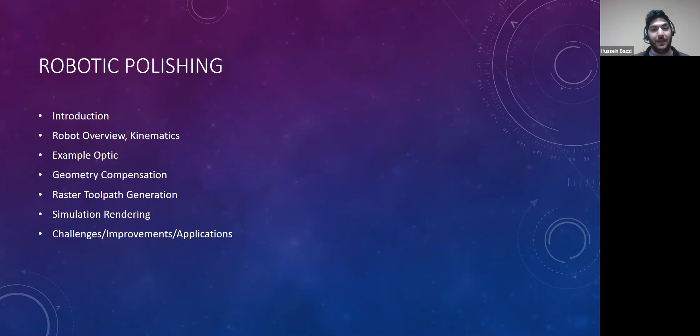So robot polishing is a great method to improve safety and consistency of the polished product. These products, in some cases, require extremely precise robotic design. A good example of this would be the ellipse mirror that we are polishing in our project.

What's interesting is that we can leverage our electrical engineering background to root cause issues and some of the quality problems, specifically leveraging our signal analysis skills. Here we gave some examples of how we can use power spectral density, Fourier deconvolution, and filtering to determine our polishing strategy and root cause some of the problems we faced during the design phase.

Here's an example of a commercially available robotic polishing system. It has 3 prismatic axes and 2 revolute axes, a workpiece mounted on the final Z stage, and a rotating tool spindle for applying the polishing force.

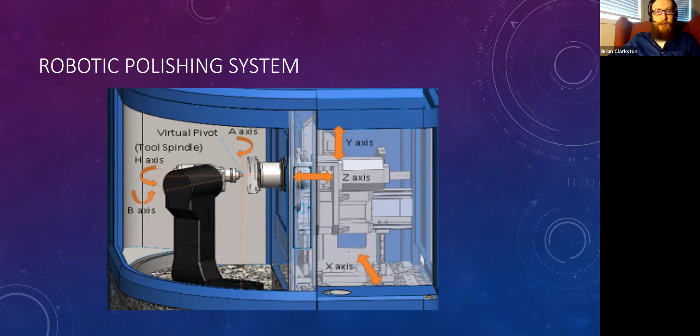This tool spindle features a load cell for constantly monitoring your polishing force, as well as being used for geometric probing on the machine to determine the orientation of the optic which you're trying to polish. So before proceeding further, we'll hop over to our demo video.

Currently we see the tool being pressed against different parts on the optic. While we're doing this, we're measuring the load cell force, and we can use that to determine if there's any tip tilt of the optic as it's mounted in the machine.

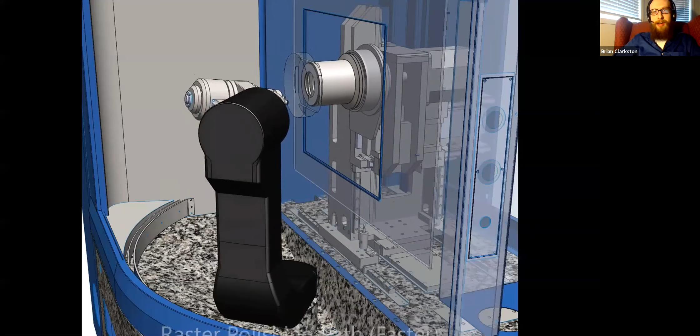After performing our geometry probing, we proceed with the raster toolpath, which we'll later show some of our MATLAB methods for automatically calculating a total of 6,000 points on a raster toolpath for this curved optic.

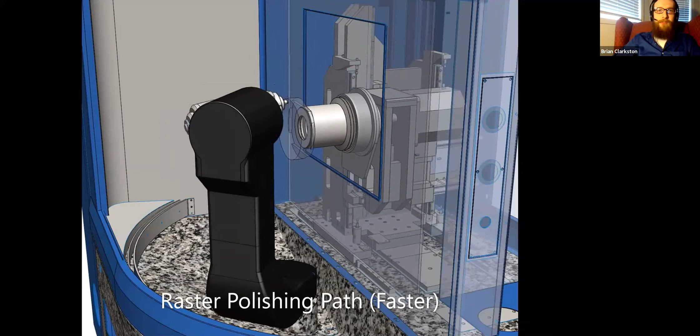It's hard to see from that angle, so we're going to give a little bit more visibility. Here we are actually looking behind the mirror, looking at the superimposed raster path along with the rotating polishing tool as it is moving along the optic.

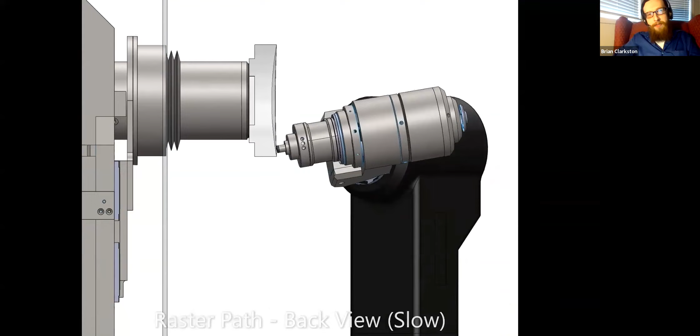Starting from the beginning of the raster path. In this view, we have better visibility of the B-axis of the machine upon which the rotating tool spindle is mounted. Here we can see that all axes have to operate simultaneously and in unison to accurately touch all points on the mirror.

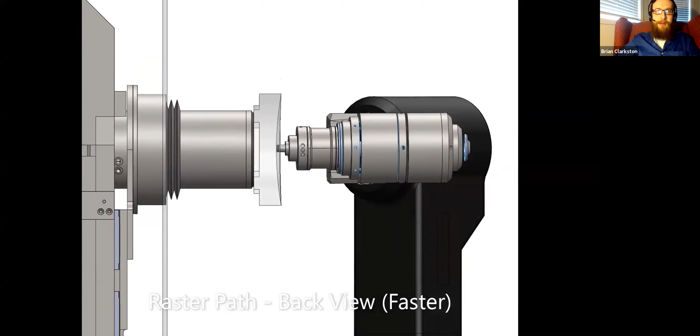Similarly, another view from the top. We'll speed things up here in a second.

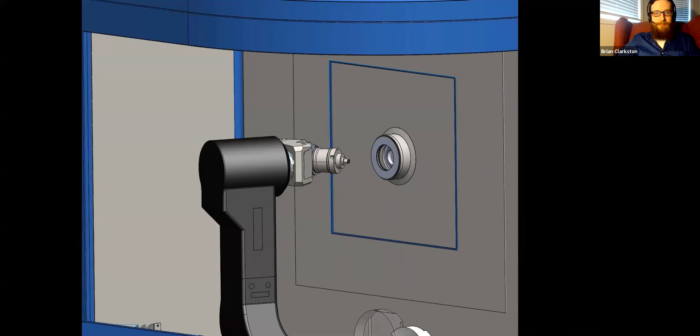Currently, we show the optic as being mounted to the machine using a vacuum chuck. However, a problem could arise, and we don't want that to happen, so we'll discuss other mounting options. So back to our presentation.

Looking at this machine, we see that we have 3 prismatic axes and 2 revolute axes. Using standard Denavit-Hartenberg parameters based on the joint offsets between these joints, we are able to derive the Denavit-Hartenberg standard parameters, which then yield a series of transformation matrices relating the different coordinate frames on the machine.

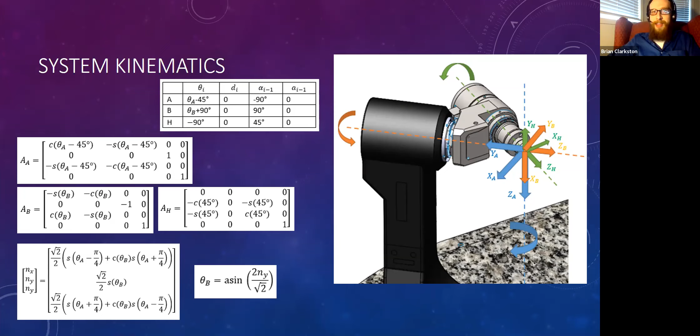We then relate that to the normal vector the tool is oriented to for a given position. We then use that orientation and derive the positions of both our A and our B axis in order to meet the orientation required at each point on that curved surface of the optic.

The optic we chose to polish in this case is a fairly generic ellipsoidal mirror. The benefit of ellipsoidal optics is that they take light coming off of a focus and refocus it elsewhere, which is largely beneficial in places where you need a focus distribution from point sources of light.

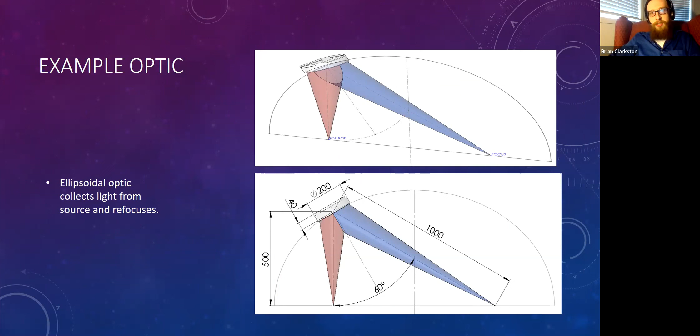From that optic prescription, we can figure out, not based on the position of the mirror in the ellipse coordinate system, but in terms of the substrate coordinate system with respect to the mirror itself and its center. Doing so, we can easily derive the horizontal and vertical positions of both the source and focus, given the property of an ellipse that the sum of the distances between the source, the mirror, and the focus is equal for all points on an ellipse.

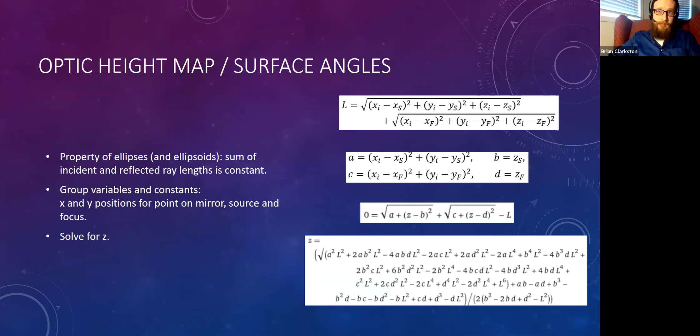So for a given XY position on the mirror, we can calculate the height of the mirror in its own substrate coordinate system without having to perform additional rotation matrices for transforming between the ellipse coordinate system and the mirror coordinate system.

Once we have the X, Y, and Z of the source, the mirror point, and the focus, we can draw two vectors between the source, the mirror, and the focus. By taking the angular bisector of those rays, we derive the surface normal vector, which is the orientation we require for the machine as we're polishing over that point.

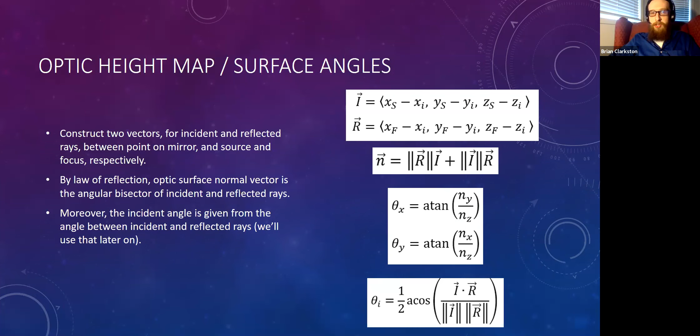And then Kevin was going to discuss how we can figure out where it is in the machine.

I'm going to be discussing geometric compensation, which is just a fancy way of saying it's our process to minimize as much error as possible while we're polishing the surface of our lens. The errors can be given by flatness, parallelism, and system errors of the grinding and polishing fixtures. A lot of these geometric errors are present when you're loading optics into a machine, and geometric compensation is just our way to obtain uniformity in polishing force across the entire tool path.

Our first process when doing geometric compensation is edge finding. Edge finding is our way to find our X, Y, and roll values. From the picture on the side, we have a picture of the lens with some coordinates. We take those and put them into our formulas with the transformation matrix to get our X, Y, and roll values for compensation.

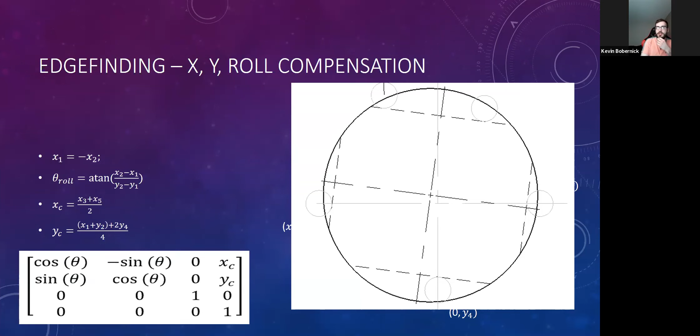From there, we have to find our Z, pitch, and yaw values. The easy way to do this that we found is to just put them in a robot spindle load cell with the polishing tool loaded.

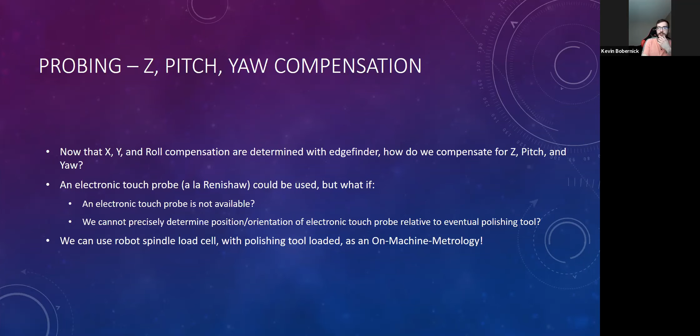And then Ryan's going to talk about our toolpath generation. Now that we have the alignment of the lens, we need to determine the shape of the lens. We want to measure where the real lens sits in 3D space and probe for imperfections. To do this, we can use the formulas from the previous slides to determine the XYZ tilt angles for the nominal mirror we're trying to create.

Again, we use two nested loops to go from point to point, but at each of these points we want to go through several steps to make sure we get good, accurate data from our probe. So for each point, we want to move quickly to a position above where our probe point is, with clearance, so that we don't hit anything. We want to do that very quickly.

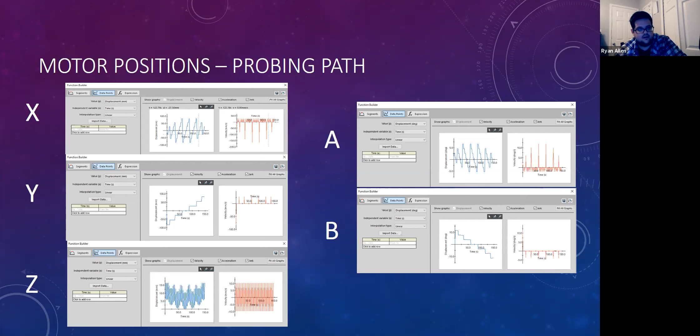Once we have those values calculated in MATLAB, we can perform a motion simulation with rendering. Unfortunately, several open source or freely available robotic simulation programs were unable to simulate this robot, by virtue of it having separate prismatic and revolute joints that needed to cooperate. Many such software packages only allow serial robots rather than parallel or cooperative robots.

So in this case, since we already had a CAD model in SolidWorks, we were instead able to perform a motion study in SolidWorks alongside the CAD design by importing each of the joint positions supplied by the MATLAB code and using those to control either linear or rotary motors to render that motion path in real time.

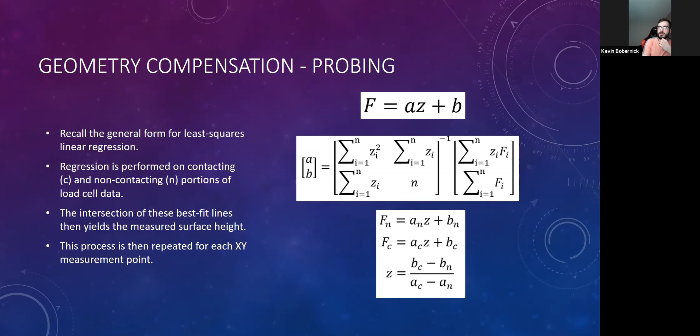The next slide is a picture of the errors between our measured and nominal surfaces. Recall that the X center, Y center, and roll angles were already compensated from our edge finding. From there, we take these values to find our least squares best fit plane.

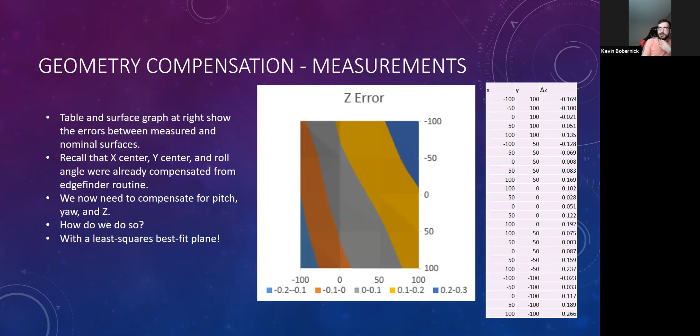The equation on the right shows our equation and the matrices for our least squares fit plane. Since the XY probing points are symmetrical, the matrix becomes a diagonal matrix, simplifying these inverse calculations. We then obtain our pitch, yaw, and Z values, which are then used in the transformation matrix, like I said, for our machine tool pathing.

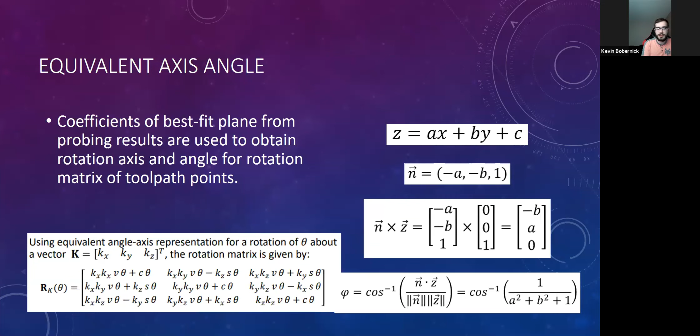So the equivalent angles are axis angles. The coefficients of these angles from the probing results are used to obtain our rotation axis and angles for rotation matrix along our tool paths. And these are just some of the equations and matrices we use to find it all.

Now that we have our probing points and our geometry compensation, we need to generate a path for the polishing machine to follow. To do that, we first need to define some parameters, like travel distance between points and distance between each pass.

For our application, we set it at 2.5 millimeters, but in a real life scenario this would be a much smaller distance. One other major thing to note is that during each pass, we also want the tool to go past the edge of the lens so that every bit of it is polished. Within our major parameters, we define that we go about 10 millimeters past the lens on each pass.

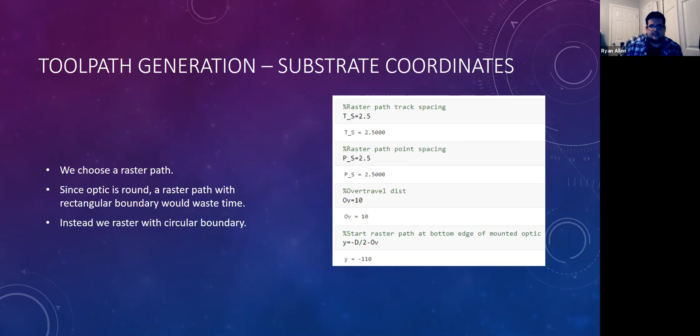The first nested while loop advances the tool in the positive X direction, moving it from left to right across the lens, stopping 10 millimeters past the edge. After that loop, a statement moves us forward to the next pass in the positive Y direction. The last nested while loop does the same thing as the first, but moves the tool in the negative X direction, so we go left to right, forward, right to left, forward, and so on until there's no more lens left to be polished.

So now that we have a series of nominal points on a perfect optic, if it was perfectly mounted, we need to take into account the results from our geometry probing and use those transformation matrices to translate from a perfect substrate to the mirror as it is actually mounted in the machine.

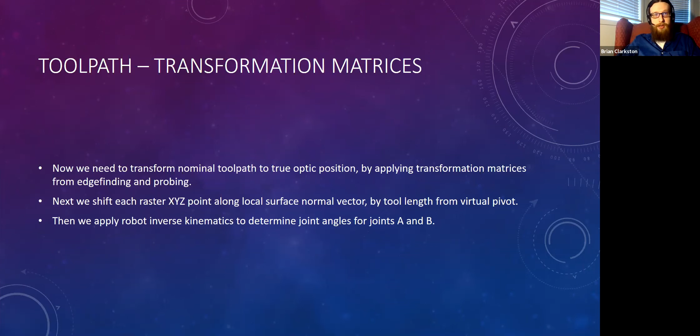After that MATLAB code, we can export each joint value as a separate comma-separated value file, concatenate that with time, import it into SolidWorks, and then simulate the raster toolpath shown previously. These are some plots of the joint displacements and velocities for each stage.

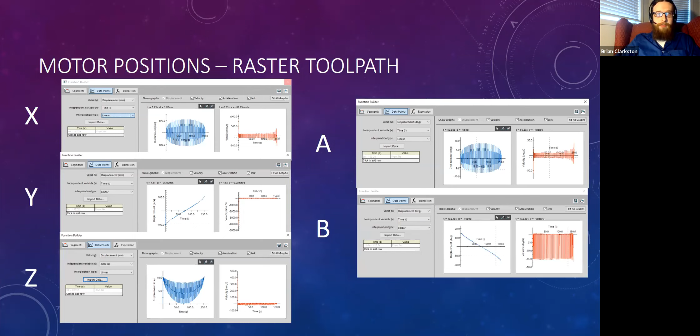Sorry, I know we are out of time. I'm going to try to quickly burn through the slides.

As we mentioned before, our initial plan was to use RoKiSim to simulate our robot, but then we realized it cannot handle this kind of application. So we had to do all our calculations using MATLAB and feed that into SolidWorks to simulate our robots.

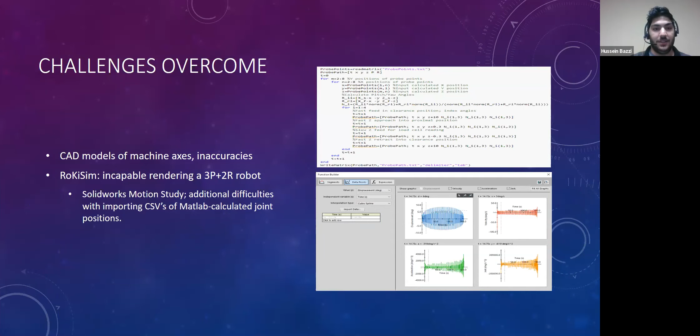Please move to the next slide. A possible improvement would be using kinematic mounting, because as we saw in the video, we were depending on the vacuum chuck, and in case we have a failure, a fault, or a power outage, this will cause a problem and most likely damage the lens or mirror we are trying to polish.

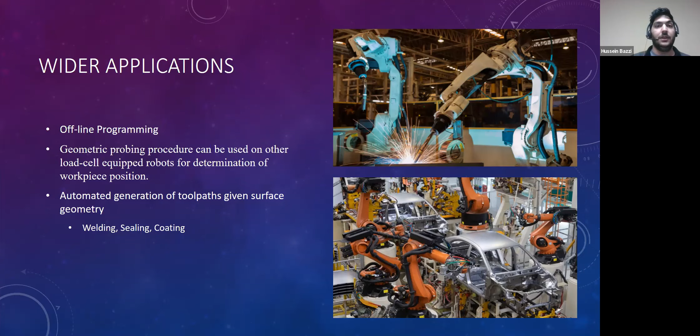Next slide, please. As we discussed in past lectures, we insisted a lot on the advantages of offline programming. Using the same techniques we used in this project, we can design robots for different applications, such as welding, sealing, and coating. So, questions, comments?

Great job, Group 16.

All right, well, I have to say this looks like a ready-to-use application. Are you guys already polishing optics? Well, unfortunately, our simulation experience during COVID was quite limited.

Okay, but it sure looks like you guys are ready to actually build the machine and start polishing some eyeglasses, maybe at least. Okay, well, this has some serious math, and I have to say your group probably used all of the math background I taught.

So this is great. Anyway, let's open up for questions for Group 16. Any questions for them? And guests can ask questions too. Anybody can ask.

I think everybody is still subdued with all the math you presented. Apologies, yeah, a lot of math for sure. It's definitely a complex project you guys picked. I think it's a great way to think through this and apply the math needed to compensate those curves. I really think it's a great try to implement this. You should be proud of yourself.

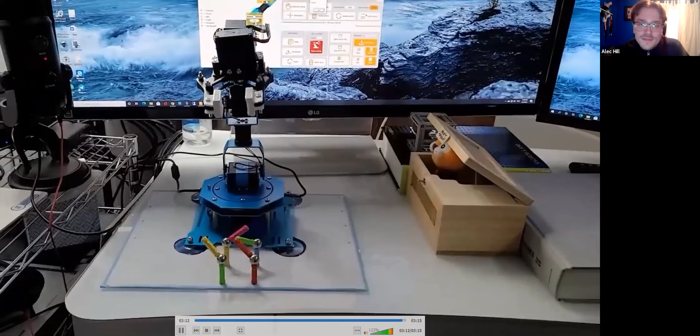The robot we were using during our project was the X-Arm 6 DOF robot, really it's 5 DOF if you ask Professor Mirza, which we programmed to construct the structure using magnetic rods and spheres, like I stated previously. Hopefully in the near future, robots will be implemented in the construction field to make construction safer, faster, and much more relaxed on the construction workers themselves.

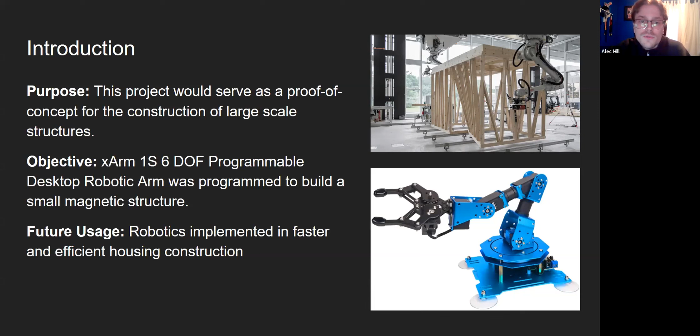Hello, everyone. One of the multiple challenges we encountered was how to grab, as Alec was saying. This robot is not ideal. The force that applies in the tip itself, the material, is not ideal for our application.

So we decided to design our own tool. We used PLA material and a 3D printer, and we were thinking to actually do two tools, one to grab the rods and one to grab the spheres. But we decided to combine both, and the goal was to design a single tool that was able to grab regardless if it was a rod or a sphere. So we were successful on that.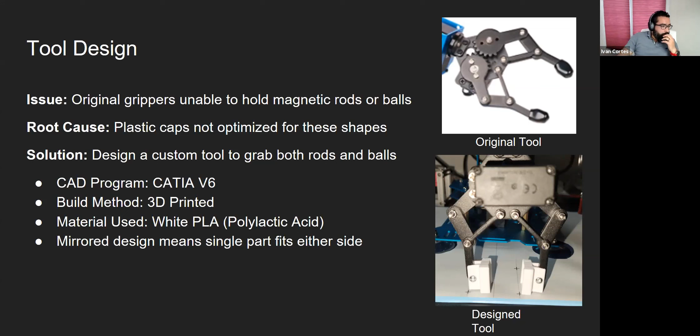In terms of programming the X-arm, as other team members already said, this X-arm robot has 4 different types of programming, but we found that the PC interface is way simpler. So we just position the robot by hand at a very close location, and after that we input those values to the servo. So we fine-tuned using those values.

And with that, I will pass over to Troy, who is going to explain more about the workspace that we use and the metal plate.

So after we established the workspace we'd be using, we positioned the robot so it was directly over the metal plate. That way the metal plate could assist us in placing and picking up our pieces because they would snap on and off. Then it was just a question of what are the limits that the robot can reach. And we found that it could pretty much pick up and place a piece anywhere on our metal plate.

The only real servo that was an issue was the base rotational servo, so there was just one dead zone toward the back. From that, we were able to calculate how many pieces we could put on either side, making sure there was enough clearance so that as the arm went down and opened and closed, it wouldn't knock any other pieces while doing so. So we could probably get about 15 pieces on each side.

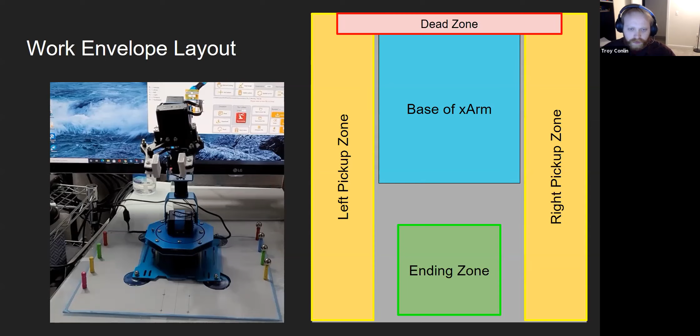So from there, it was about determining what sort of structure we could make. Unfortunately, the X-arm is very limited in terms of its degrees of freedom, so we couldn't make some crazy huge structure. From those previous calculations, we had about 30 pieces we could work with, so as long as it was smaller than that, we were fine.

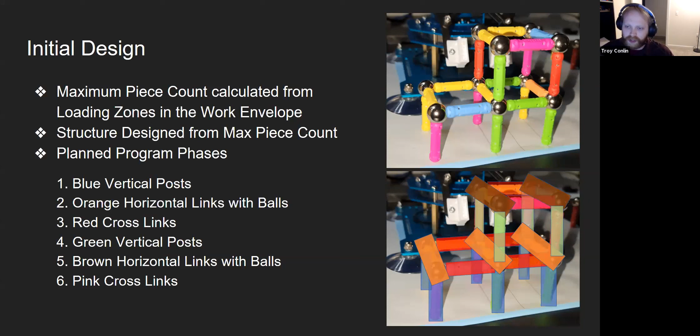And then the design would be as follows: it would place the base blue poles first, then drop in the horizontal pieces, then the next level, and the next level, and the next level. With that in mind, we had to make sure the arm was capable of even placing these pieces, because there are issues otherwise.

So we wanted to start simple and work our way up, and unfortunately we weren't able to work up that far. The X-arm has a lot of limitations that we ran into, the worst being that the wrist wasn't rotating as freely as we thought it would. It was only around 80 or so degrees of freedom, so we couldn't actually rotate a piece from 90 degrees to 180 degrees. From someone else's presentation, it looks like it actually can, so there might just be an issue with the servo that we had installed. So that's another conversation.

Our design had to change as these limitations became more prevalent. The fixtures that we had for the horizontal pieces that we used to pick up and place, the arm wasn't able to open wide enough to grab those too, so we had to sacrifice those horizontal pieces as well.

We wanted to do some crazier stuff, like dropping some pieces from the sky, and ironically 3 out of 3 times it worked, but something about that just seemed off, so we scrapped that idea too. But otherwise, even with the unreliability issues, we were still able to make this structure fairly consistently.

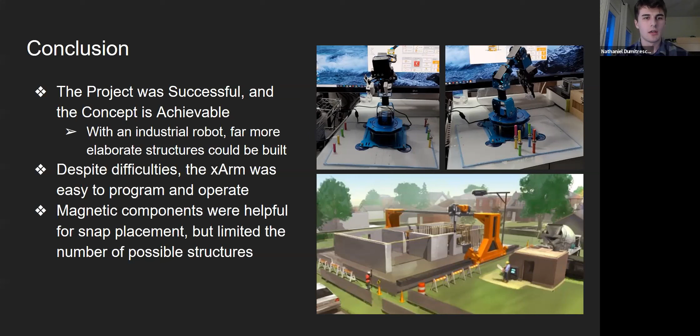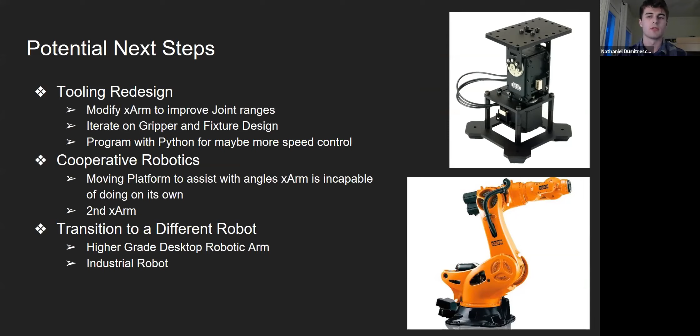Good job, group 17. Good demo, good presentation.

All right, so I was really hoping that at the end that you'd push those sticks to form a roof, like a pyramid roof. Yeah, anyway, so let's open up for a question for group number 17.

Any questions for them? Yeah, hey, this is Mike. Has the group thought about, they talked about doing construction and applying it to the construction industry. Are they referencing mostly the prefab approach, or have they thought about the challenges facing doing construction in the field?

That's a good question, Mike. I would say more or less construction in the field, as it'd have to be transported to the work site and then put up the foundations, like I said, or put up whatever they needed it to put up.

Okay, with a follow-up to that - if I'm doing a prefab in a building, making prefab, I have a controlled environment. If I am taking it to a job site, I have changing environment, changing power requirements, and changing foundations. All soil's not the same throughout the US. What thoughts have you put into addressing those type of issues?

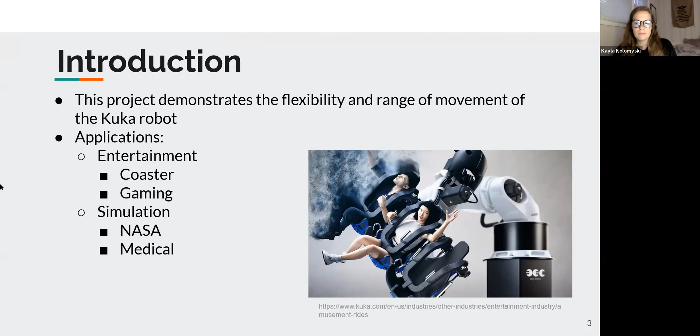Next slide, please. Here we have a short video of the actual KUKA coaster, which is from their website, just in case none of you have seen this represented before.

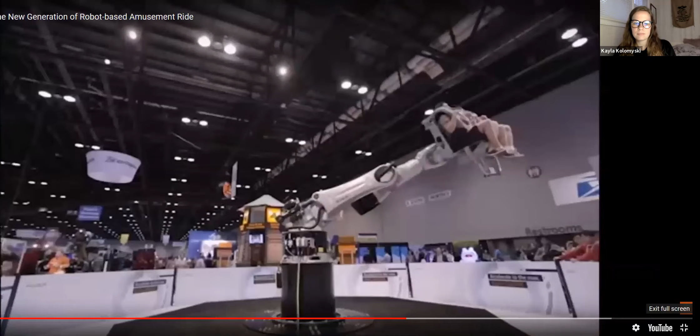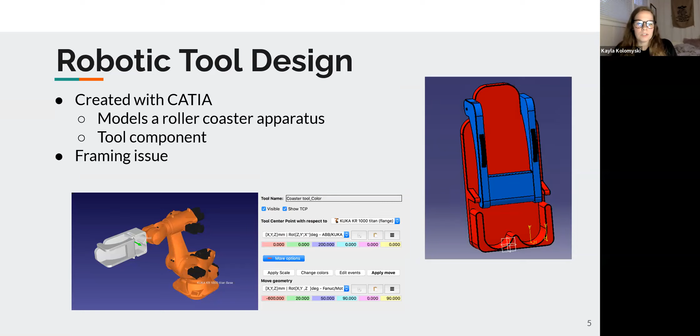Next, we have Tyler talking about our simulation tool. Like Kayla mentioned, we chose RoboDK as our simulation. The reason we did this is, one, it's very user-friendly. Basically, we found a really good startup guide that RoboDK provides that taught us quickly how to use it. It also was very valuable in using CATIA, as well as coding in Python for choosing what level ride you wanted to go on. So it was very helpful.

So when we were creating the simulation, we ultimately chose to use the KUKA KR1000 L750 Titan, due to its long reach -- it basically can span out to roughly 12 feet. It's a 6-axis robot. It has a very big payload, so that's also good. The range and motion speed is very good, especially when you're going on the fast setting and the robot is going very quickly.

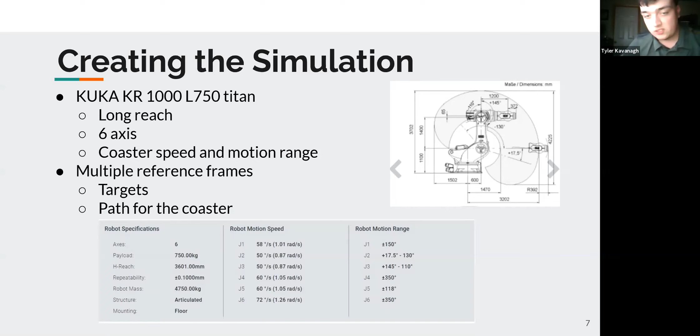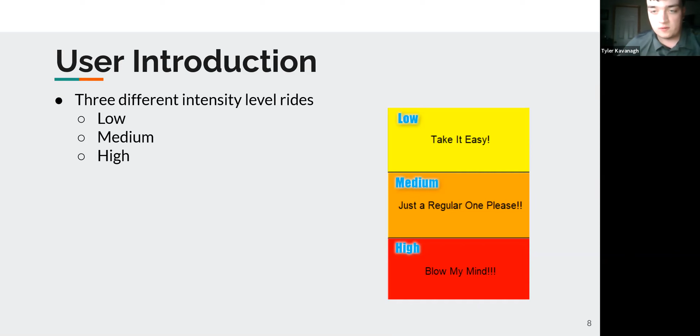Next, I'm going to send it off to Zichuan to talk more about changing speeds. There are two speed settings, the linear speed and the joint speed. In this project, all the speeds are set as joint speed because there is a lot of constraint on the linear speed, and it is easy to meet singularity problems. Set the speed before the robot moves; the robot speed will follow the speed setting when the robot begins to move.

So there are three types of ride. The first one is the experience version. The trajectory is put in the slide. Because this is used for tourists to experience, the speed is not very fast, and the path is short, more like sightseeing. The fastest joint speed is 5 degrees per second, and the joint acceleration is 5 degrees per second squared. In our vision, it can be combined with VR goggles, so the tourists can take the virtual tour in a small place.

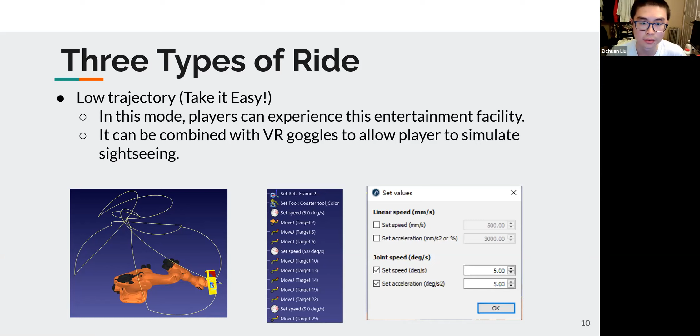The second one has a more complicated trajectory and faster velocities and accelerations. The fastest joint speed is 30 degrees per second, and the joint acceleration is 6 degrees per second squared. In this mode, tourists can feel experience like a roller coaster being tossed around. In our vision, it also can be combined with VR goggles to experience immersive space combat scenes because it is more intense.

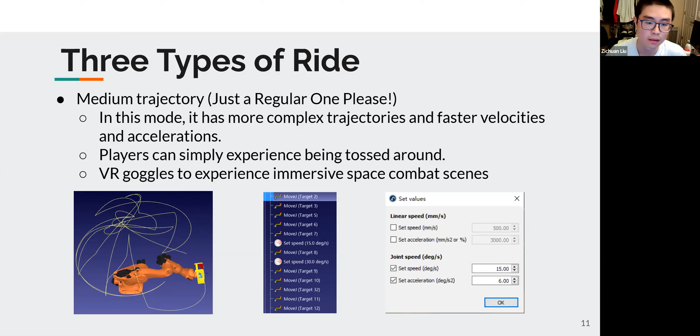The third one has the same trajectory as the second one, but the speed and acceleration are faster. The fastest joint speed is 50 degrees per second, and the joint acceleration is 10 degrees per second squared. This one is for tourists who want to challenge themselves. If they want to play something crazy, try this one.

So next one, we'll send Naveen to talk about the simulation. Yes, along with the ride itself, we also wanted to make the ride free for users to just try it out. No need for another person for you to select. In the real world, it would be kind of a touch screen interface where the user can select a ride, and he can just ride as much as he wants, and he can let go. At the end of the ride, we wanted to provide a message to the user. It could be anything. I thought of also adding collecting feedback from the user, how was the ride, kind of thing.

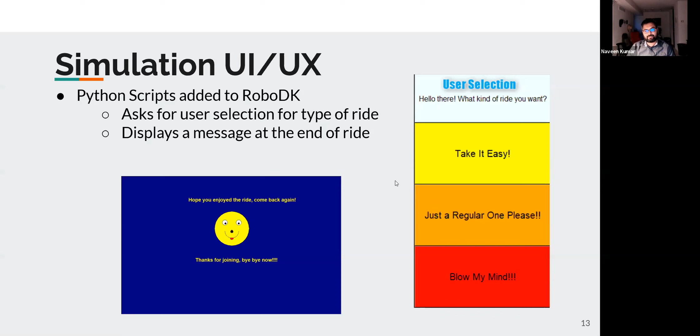For the programming part, there were two parts. One for moving the robot itself, which we did using RoboDK, and the instructions were pretty simple. Here you can see the instruction for moving a joint to a target and setting a speed, and those programs can then be converted for offline programming. Basically, we can flash the same code on the real robot. Another part of the programming was Python scripts, which are not shown here. That was just simple Python scripts to get the user input, and based on the user input, it would select accordingly a program to run on the robot.

So in conclusion, the project was a success. We were able to show that robots are really great for the entertainment industry, and this is just the tip of the iceberg. There are limitless possibilities for these kinds of applications, like VR rides and gaming. And even if we put two of these robots on rails, we can even play laser tag with these, I guess.

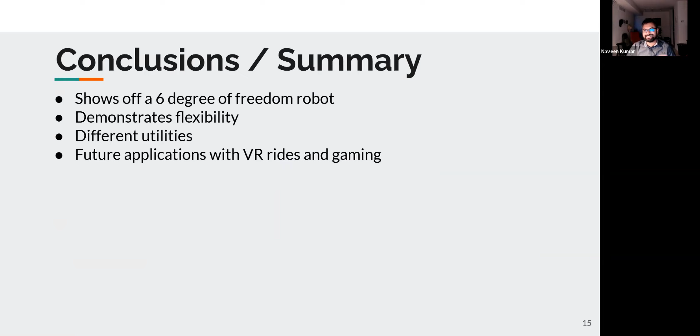Good job, group 18. Good presentation, good demo.

Anyway, reminding everyone that I've already sent the link on YouTube where all these demo videos are, so go and watch there in full glory. I know the sound and the video become choppy on the Zoom session, so if you really want to enjoy all these videos the students made, most of them are really good and funny. I really enjoyed watching all of those videos, very creative. I did become dizzy watching this video though.

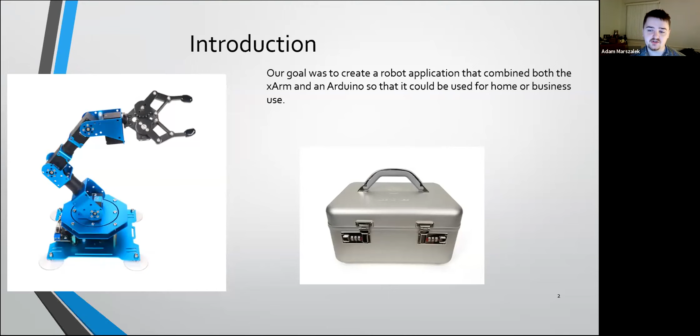So we worked on the Lockbox Robot. Short introduction before we go into the demo video. Our goal was to create a robot application that combined both the xArm and an Arduino. So we wanted something that, I guess to describe it, could be used with an external controller. That was our main process, and we wanted to do something where we combined our previous knowledge from other classes into this class.

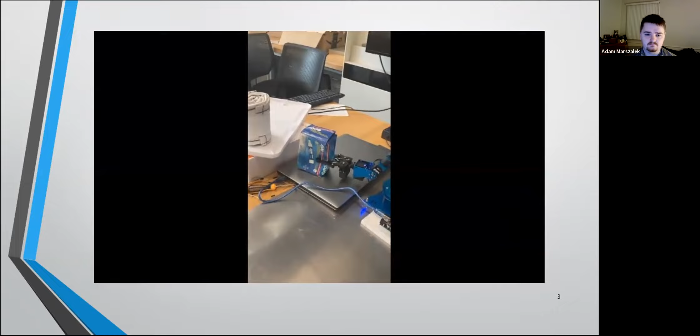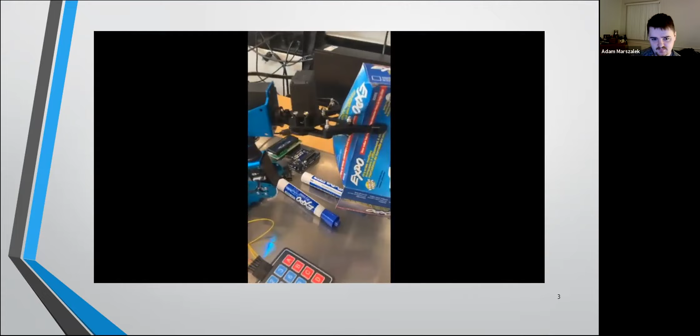Playing again. Yeah, so that's our short little demo on our robot. As you can see, we set it up so it picks up the key. I punch in a code on the keypad, and then it picks up the objects that I told it to do.

But onto the slide here, the project process. So our first thought was actually to do a dice throwing robot, because I have some dice and I thought that'd be fun. See if I can get it to throw simple numbers, or even something specific like stacked dice, if you've ever seen people switch the cups around. I don't know how they do that.

And then the second application idea was something that could fold laundry using those fancy t-shirt folding things, because we wanted to do something practical.

So for this project, we built a lockbox with a robot. When people enter the certain passcode on the keypad attached to the Arduino, the Arduino will send a signal to the robot through serial communication, and the robot will take action to store or retrieve the item to or from a different storage location.

So here's the base level Arduino design overview of our project. On the left, we have our simple Arduino circuit where we connected the membrane keypad that comes in the kit we all have, using 7 pins. Additionally, to connect it to the robotic controller shown in the middle, we used the RX and TX pins, since that's the native support for the robot controller, in addition to a ground.

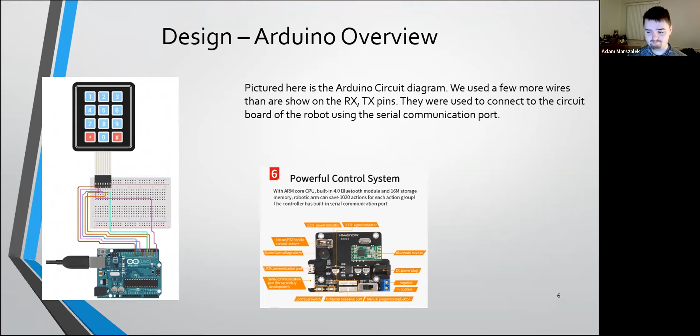This is what the company that creates the robot actually recommends using in a secondary, peripheral programming type of way, and it goes with the Arduino. It's just drag and drop type coding, but it wasn't super useful for us because what we were creating was different than their presets. They have all these fancy preset things where they set it up with an ultrasonic sensor so it can see if something's in front of it. I thought that was pretty cool.

But we mostly wrote our code using the Arduino IDE.

As we'll explain later, we program the motions using, I don't know, I can't remember what the program is called for the robot, sorry. But the robot comes with the program as the other groups have shown you, and we can download those action groups onto the robotic controller. Then when we call them through the Arduino, it performs them.

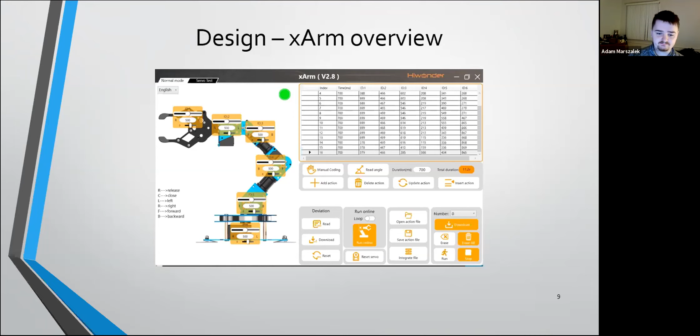So with the results, I mean, as you saw, it works. I like it. I think I love it. You know what? I need to be confident in my project. I love this robot.

It picks up things in kind of a set trained motion, and it obviously can't see, which is one thing I don't like.

Problems encountered: the Arduino and writing the code for it was actually one of the bigger problems we had, because there wasn't a lot of information. I spent hours looking through different user manuals trying to find something that could help me. They have nice videos online, but they're all for their own kit, like 'oh, buy our Arduino kit.' And I'm like, no, I know I can do this with mine. But eventually I figured out it was a library I had to download an extra library to the Arduino, and that was the missing key for me.

Then we actually had some problems connecting the robotic controller to our computer. I don't know if it was my computer or something, but it did not want to recognize it for a while. So that was kind of a minor setback for us.

Third, I forgot to mention on the slides, if you notice in the video the arm is a little shaky. It really struggled holding the objects, and that was partially due to the speed we were running the arm at, and the angle we were using the arm with. So in the future we would try to improve that.

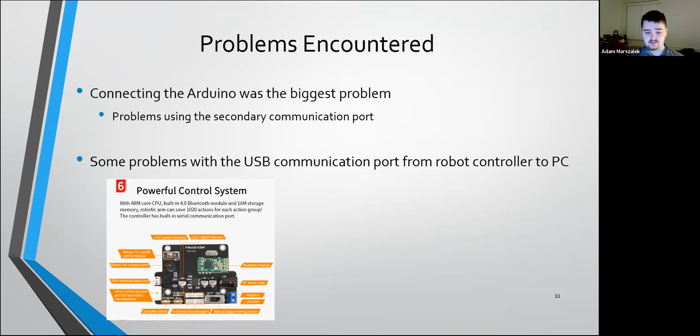So how would we expand? We would be interested in implementing a bigger program or bigger robots, bringing it into real life. The robot system you see is not really static, and it will shake a bit.

Also, I want to say we could add a screen on the Arduino, so it can show what you type for the password, and it will give a notice if we enter the wrong password.

Another thing is security. If we really bring it to life, we need some security features to increase the security system, like giving a longer password, or letting us enter the password ourselves. That's it.